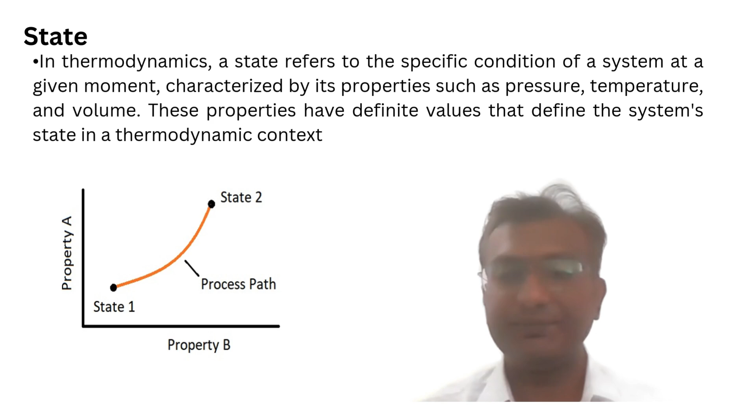Now that we know what a state is, let's talk about process. A process in thermodynamics refers to the transition of a system from one state to another due to changes in properties like pressure, temperature, or volume. For example, if we heat a gas in a piston cylinder system, the gas expands, increasing its temperature and pressure. This means that the gas is transiting from its initial state to a new state. And this transition is what we call the process.

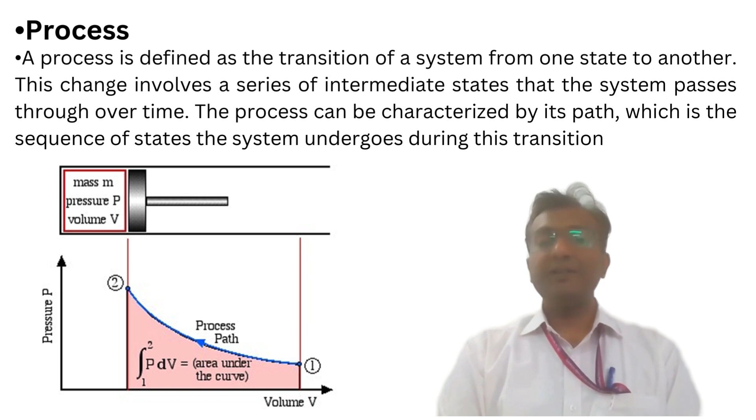A process can be fast or slow. The process can be reversible as well as irreversible and can follow different paths depending on the external condition applied to the system. This brings us to one more new concept which is called path. And in the next slide, we are going to see this path in thermodynamics.

The path of a process refers to the trajectory or series of intermediate states that a system follows when transiting from one state to another. Imagine you are traveling from one city to another. There can be multiple routes to reach your destination, and each route represents a different path. Similarly, in thermodynamics, a system can go from an initial state to final state following different paths depending on how the process occurs.

For example, if we plot the pressure and volume of a gas on a PV diagram, we can visualize different paths that the system takes. One path might be an isothermal process where temperature remains constant, while another path might be an adiabatic process where no heat is exchanged. Understanding the path of a process helps us to analyze how energy is transferred and work is done by or on the system. Now, let's move to a new important type of process called the cyclic process.

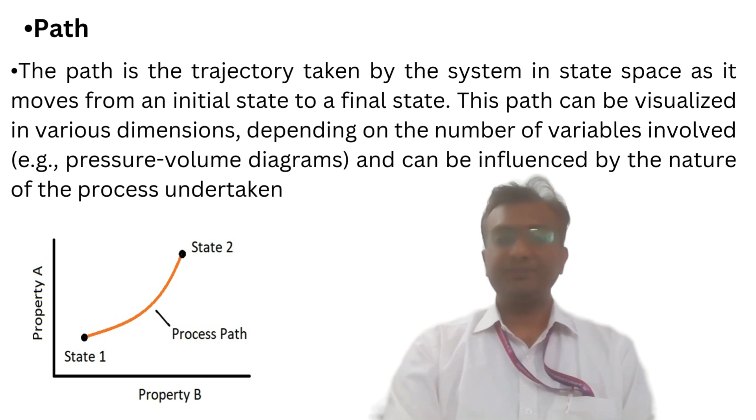Coming on to the new concept, as we discussed earlier, cyclic process. A cyclic process occurs when a system undergoes a series of processes and then returns to its initial state. For example, consider a heat engine, such as an internal combustion engine in a car. The engine takes in fuel, burns it to produce power, and then expels waste gases, completing a cycle. At the end of each cycle, the system returns to its initial or original starting condition.

A key characteristic of a cyclic process is that the total change in internal energy over one complete cycle is zero. This is because the system ends up in the same state where it started, meaning that whatever energy was added to the system has also been removed from the system.

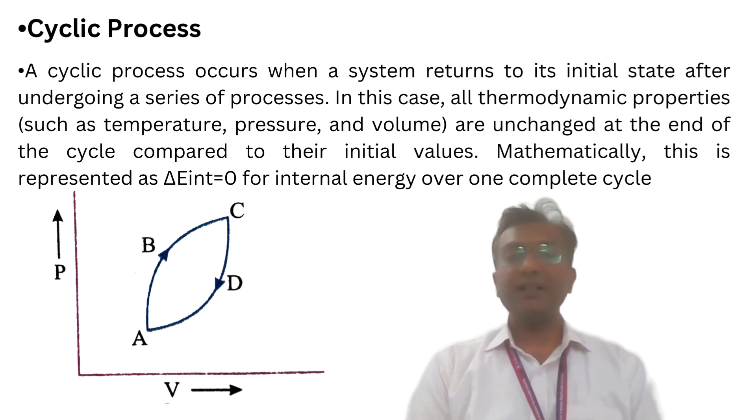Cyclic processes are fundamental in designing power plants, refrigerators, and air conditioning systems. Let's now discuss another special type of process, the quasi-equilibrium process. A quasi-equilibrium process is an idealized process in which changes occur extremely slowly, allowing the system to remain in equilibrium at all times.

Imagine a gas in a piston, and we are compressing this gas very slowly. Because the process is very slow and gradual, the gas remains uniform in temperature and pressure at every moment. This is what we call a quasi-equilibrium process.

Now, such processes are important in engineering because they allow precise analysis and control. In many cases, we assume a process to be quasi-equilibrium to simplify the calculation or the analysis, even though real-world processes are often not perfectly slow or uniform.

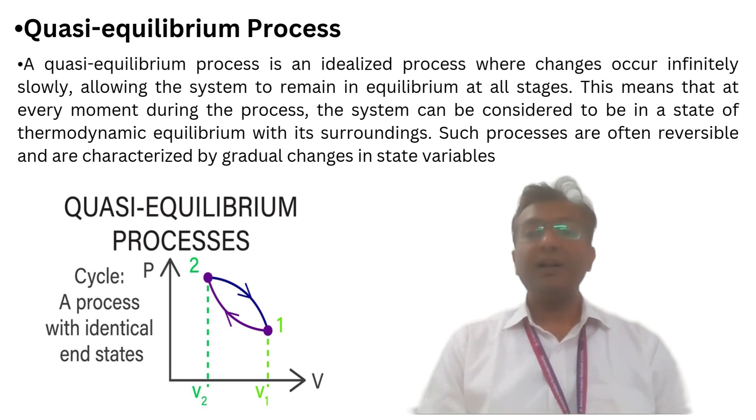Now let's talk about two important classifications of a process, which are reversible and irreversible processes. First, let's discuss the reversible process. A reversible process is one that can be reversed without causing any change in both the system and its surroundings. This means that the system can go back to its initial state with no net energy loss.

For a process to be truly reversible, it must occur under ideal conditions, meaning there should be no friction, no turbulence, and no energy dissipation. An example of a reversible process is the slow controlled compression or expansion of a gas where every intermediate state is in equilibrium. However, in reality, most processes are irreversible.

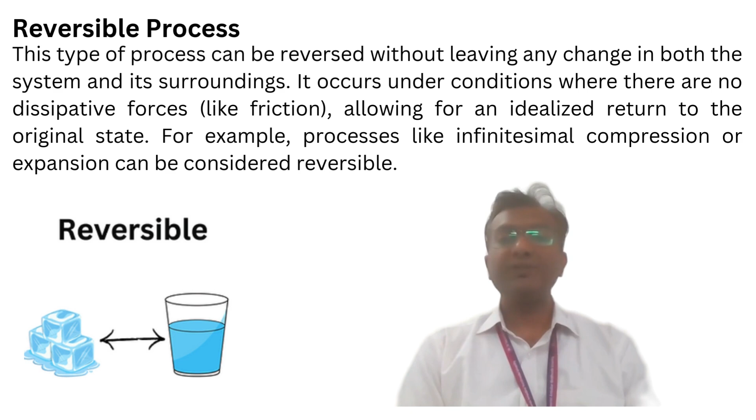Coming on to the irreversible process, an irreversible process is one that cannot be reversed without causing changes in the surroundings. This process involves factors like friction, turbulence, heat loss, or mixing of substances, which prevent the system from returning to its original state or original condition.

For example, when you let air escape from a balloon, it expands rapidly and mixes with the surrounding air. This process is irreversible because the air cannot be recollected back into the balloon without external intervention. Other examples of irreversible processes include heat transfer due to temperature difference, free expansion of gases, and chemical reactions. Most real-world processes are irreversible, but understanding reversible processes helps us to design more efficient energy systems.

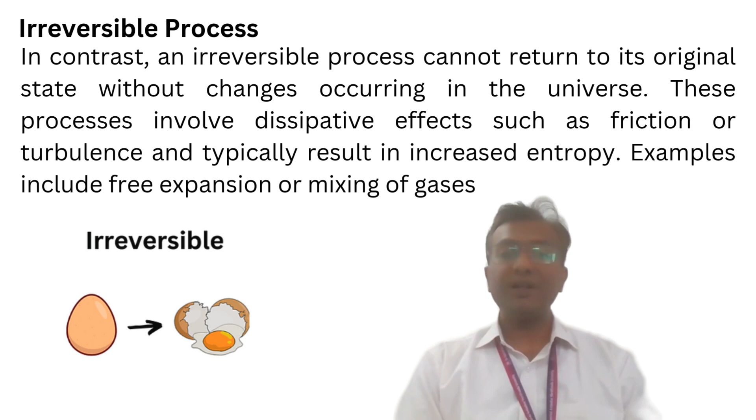Now, let's summarize today's session. Today, we have seen in this lecture the first important concept, the state of a system, which is defined by its properties such as pressure, temperature, and volume. After that, we have seen the important concept known as process. A process is a transition from one state to another. The third important concept, path. The path describes how a process occurs.

Next important concept was the cyclic process. The cyclic process returns to its original state with no net change in internal energy. We have seen a quasi-equilibrium process that happens very slowly, and all the system properties are at equilibrium with the surroundings. Then we have seen the reversible and irreversible process. A reversible process can be undone without any net change, whereas an irreversible process involves dissipation and cannot be reversed naturally. These concepts are the foundation of thermodynamics and are crucial in designing engines, refrigerators, and other thermal systems.